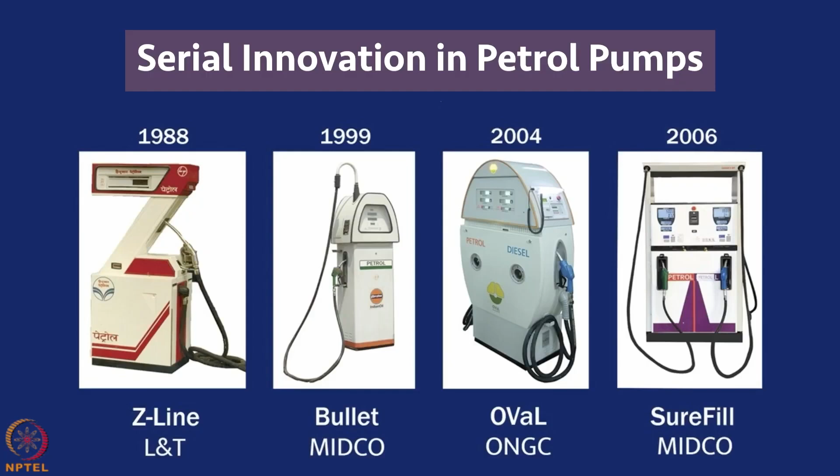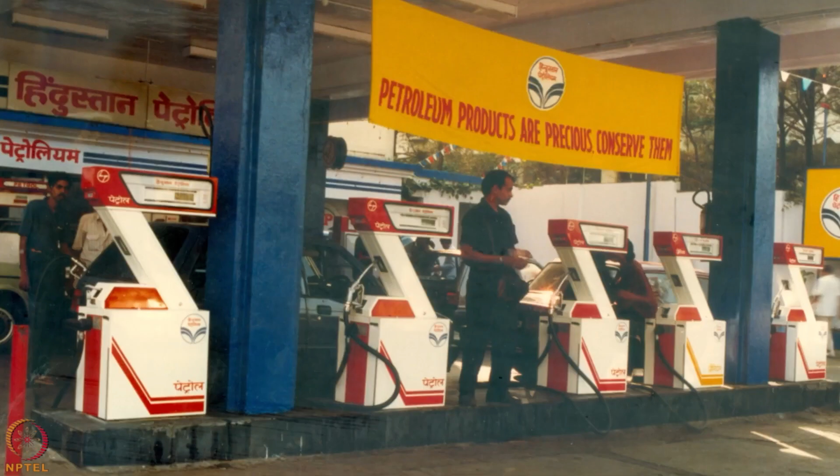When does serial innovation happen? It happens when you're in the same product segment, doing innovation every 10 years or every 5 years depending upon how the product is going forward. Today we're going to discuss the bullet dispenser, the center part, the bigger product. Though the Z-line was so successful that it swamped the market, and all the petrol pumps showcased the Z-line petrol pump, what happened? How could you actually upset or offset that and come up with another product? This is a very important lesson for us, so please see how this happened.

In fact, when I was doing it, it was like research for me. I was doing research in this area to see how I can come up with a methodology for innovation. So same products across different timelines, and you're taking it to the next level of innovation. I'm showing you this serial innovation specifically because finally it is the users at multiple levels who are actually accepting your product, and how they are demanding and requesting for it.

A very interesting thing happened. Once the Z-line was very popular, already 6 to 7 years in, I got an offer to join as faculty in IIT Delhi to start a new program in design. So I accepted the offer and moved from Larsen & Toubro to academics. Then I started doing a lot of programs for industry, telling them how creativity is important for engineering, how innovation methodologies are critical, and how design thinking is very important for making wonderful models to understand design details.

While doing all that, the competitor's head of R&D was in one of my exposure workshops for industrial design. When I was looking at all the research and documentation, I found that a product has a life, and it's ethical to start working on a new design in the same domain only after the lifespan of that product is over. The lifespan given to the Z-line pump was 6 years, and it was already 8 years when Midco came to me. So we said, please come, we will work on this project.

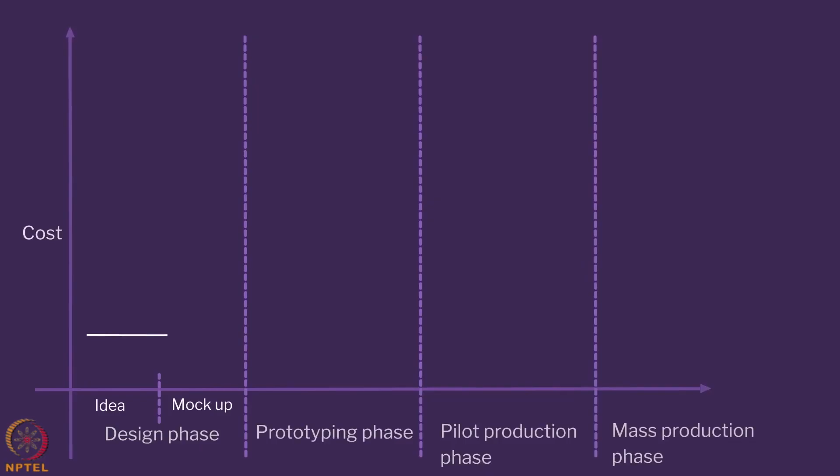So he sent the CEO of the company here. Top management support is very important because the innovation process is a very expensive process. The expenses build up as you go through the process. The idea and design phase is not very expensive, whereas the prototyping phase and the mass production phase are very expensive. And just imagine, when a company is not doing well, will they have enough money?

The CEO of the company was in the family business. So he took special loans and said, I have to spring back, and I have to work with the best in the country, including collaborations for various engineering components—we need to spring back. So this Mr. Arup Chatterjee, the CEO of the company, came back to IIT and said, you have to work with us. Now that you're a faculty, you should work with us and produce a pump. They didn't say at that time that you should replace the Z-line or whatever—they said you have to design a pump so that we also can be in the market.

All on the same framework I learned at L&T. Remember, I was very clear: contemporary materials, understanding users in the best possible way, bringing up creative ideation. At every stage—manufacturing, technology—creative ideation is a must. So these three pillars were used every time, and we used the same three pillars again for this process. We took it as a student project and started the journey.

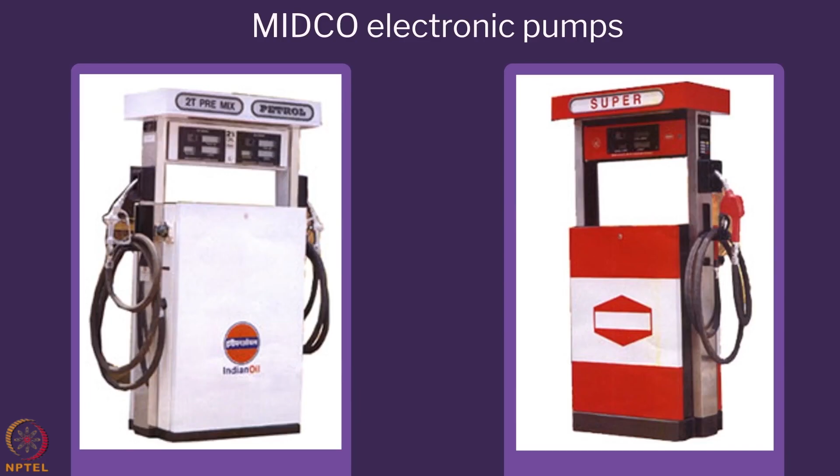Now look at what Midco was selling—this was what they sold before the Z-line came up. This was 3 years ahead of the Z-line, and after the Z-line came out, nobody was buying this pump. Our electronics was superlative, our shape was phenomenally new, our manufacturing was excellent, our quality control was very, very good, and cost was low because we designed for low-cost production. Every part of the sunflower model, those petals I showed you, were excellent—so this pump could not compete.

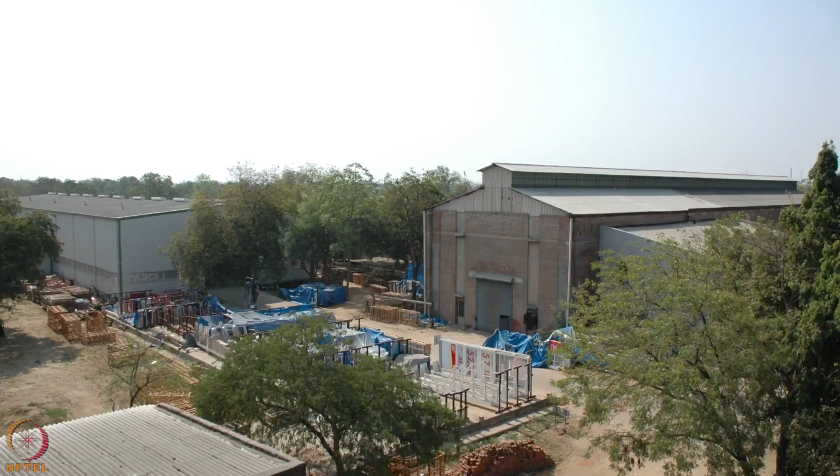Compared to Z-line, you can see that Midco was a very small company, 1/100th or 1/1000th the size of Larsen & Toubro. Their advantage was that it was a single-product company—they had no other business other than petrol pumps. And they came into petrol pumps after manufacturing gas cylinders.

We need three important things when a new company comes in. You need investment in manufacturing, investment in human resource, and the biggest challenge is that human resource for design was very difficult to get.

Customers were far more demanding over the years. It's already 8 years since we did the Z line, and a lot of things changed in that time. Remember I gave you the example of laptops - every year we get laptops which are better, cheaper, much more capable. Same phenomenon here. After 10 years, a lot changed, so we need to look at everything in a new way.

As soon as we started the work, the company was very aggressive. You all know innovation happens in war-like situations - Midco was completely out of market, starving. So within IIT, luckily one of my students agreed to do this project - Manoj Dubey, my student at IIT Delhi, third or fourth batch of the design program. Manoj took up this case. We used the same formula of ideation, taking inspiration, making multiple small models, and doing CAD modeling.

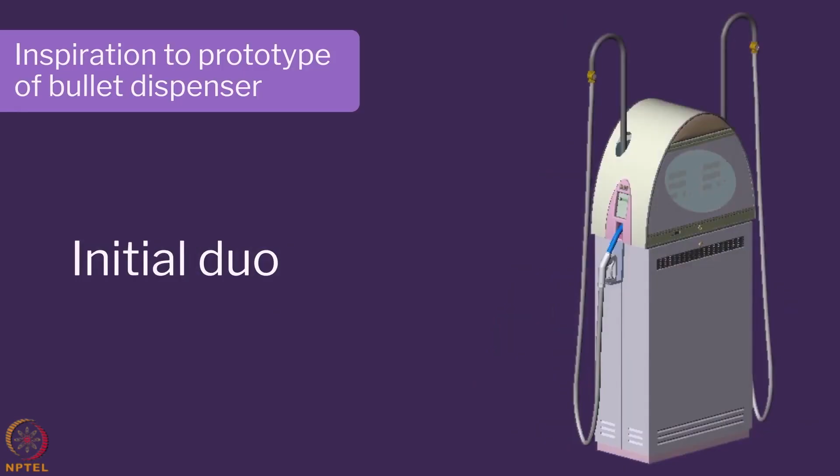Today I'm going to discuss the management and collaboration issue more, because all others are constant, whereas in the Z line I didn't talk about that much since L&T had all the structures inside very well. What happens when the designer joins the company? You get tremendous synergy to take the project forward.

So Manoj Dubey had joined the company with Midco. Then Midco started a new department in design. When you're doing innovation, sometimes your old human resource is not good enough - you have to bring completely new people. So Midco hired completely new staff for doing design, CAD modeling, because the old staff didn't know how to use CAD to take products forward. This was a completely new setup where the design was supposed to be taken care of.

Now look at the interesting situation. You have the display, which is large. You have the hose coming from the top. You have a vertical organization - earlier there were boxes, right? Now you got a vertical sleek look. So the organization and form is very, very critical, and you had to come up with a new design.

Why do you think you're able to dispense fuel faster from this? More pressure with the hose from the top? That's a good point, what else? But if I have more head, will I get more pressure? There's a motor pumping it all the way to the top - the motor is anyway pumping, so I took it up. But then why should the delivery rate increase?

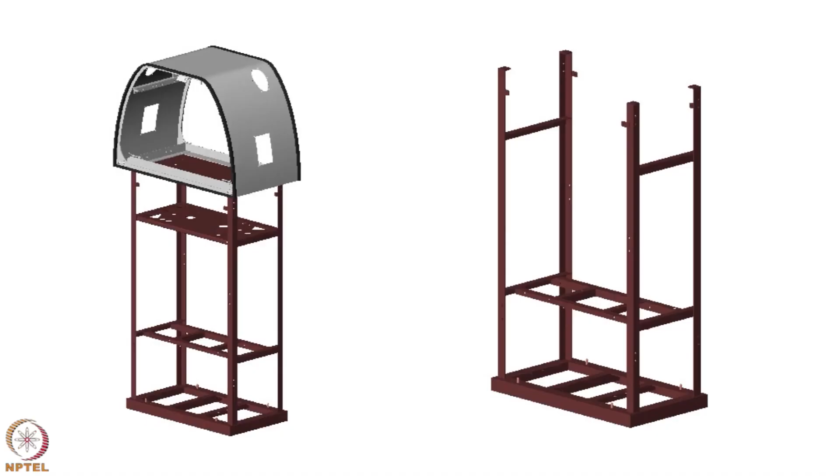You all understand what is a chassis, right? Frame. So this whole pump was built on a chassis. Then it had this convenience for mass production - I'll come down to that a little later. It had a large display fascia.

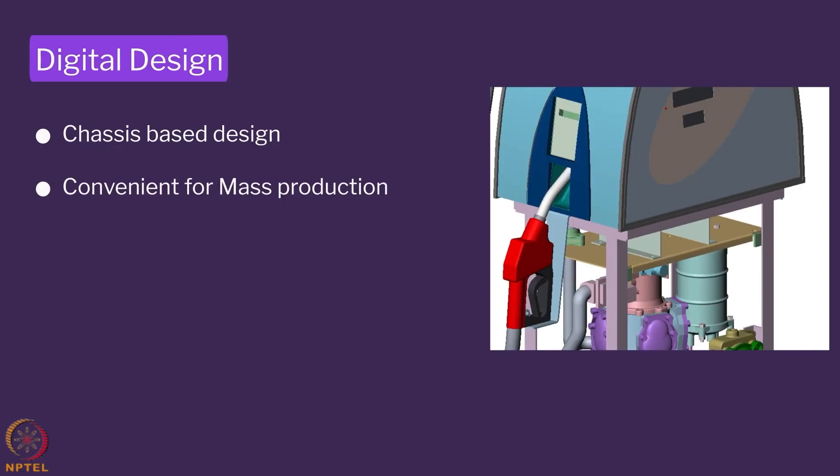That large glass and large fascia was very critical because at that time we had large TVs coming into the market, so people were very tuned to seeing large displays. It also satisfies international norms for safety. Midco very early told me that we want to export this pump all over the world, so the standards have to be met, and when standards have to be met, explosive standards are very stringent. You need to have something called an air gap between the electronics and the hydraulics - can you see that air gap in the middle?

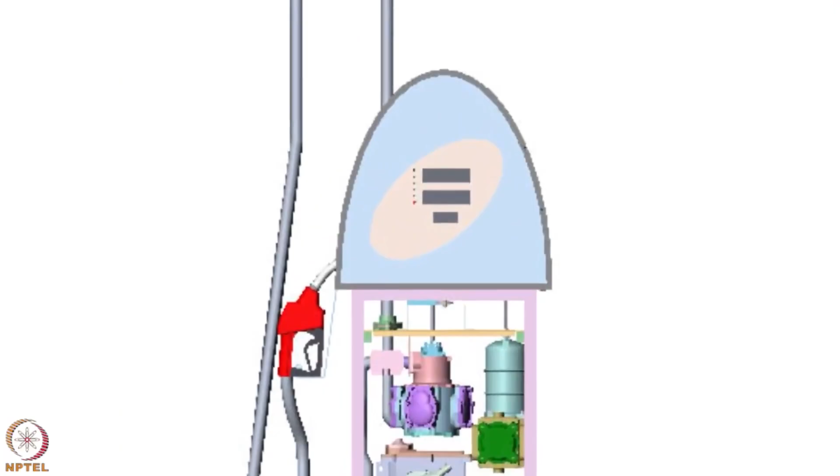Why do you need an air gap between hydraulics and electronics? Any sparking in the electronics can produce fire and explosion, because that environment in the bottom is rich with hydrocarbon, rich with evaporated petrol or whatever. So you need to have a barrier between the two, and that was an important norm.

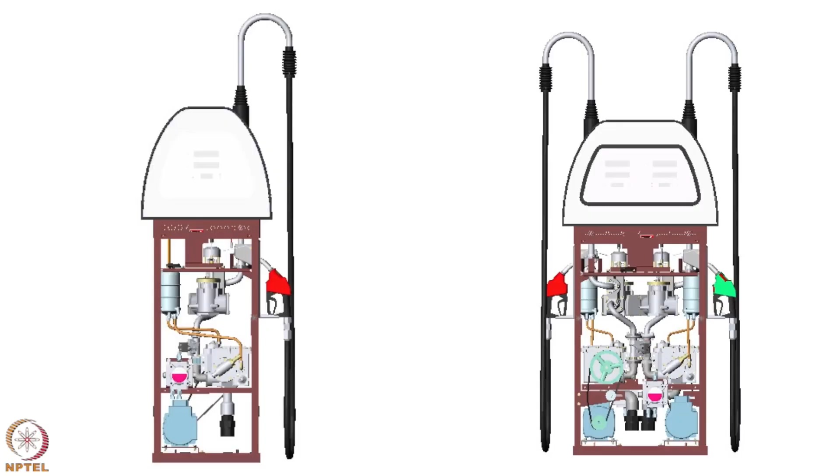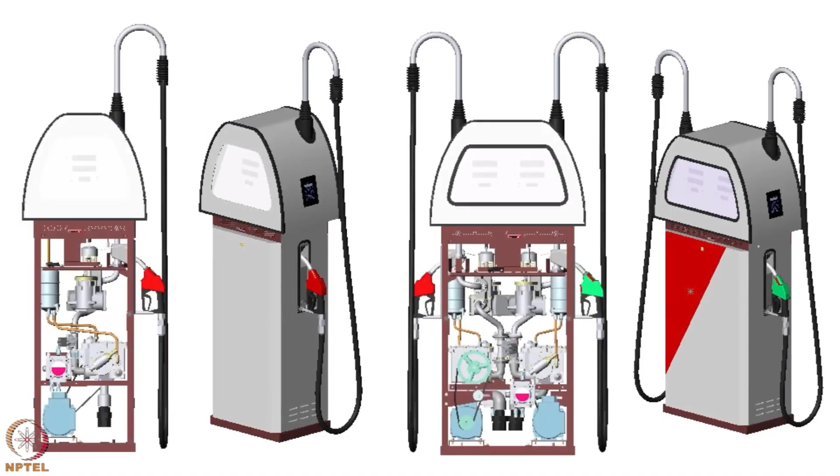We used computer aided design a lot, and we had very high accuracies and very high modular design. So how computers helped us was, once you make this structure, we could fit a single pump and double pump also. What's the advantage of this? Again, less number of parts.

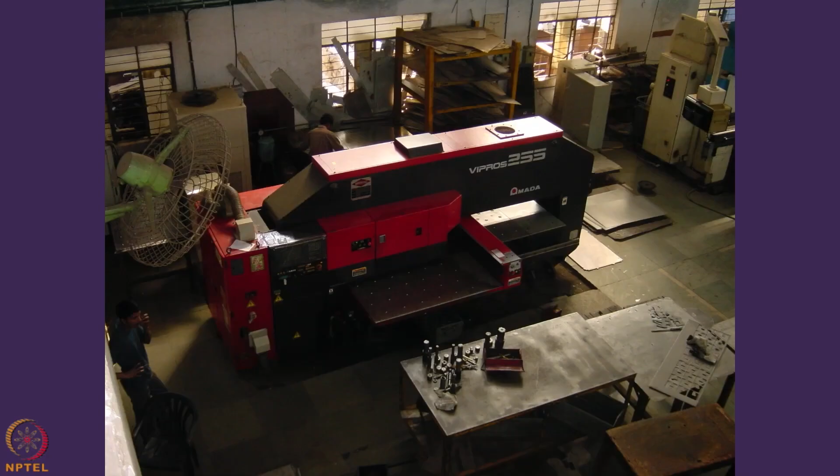And Midco is not a company like L&T which had all its manufacturing in-house. So what they were doing, they were getting components from the vendors. So when you were getting components from vendors, it makes sense to have modular construction where you can have the same components again and again.

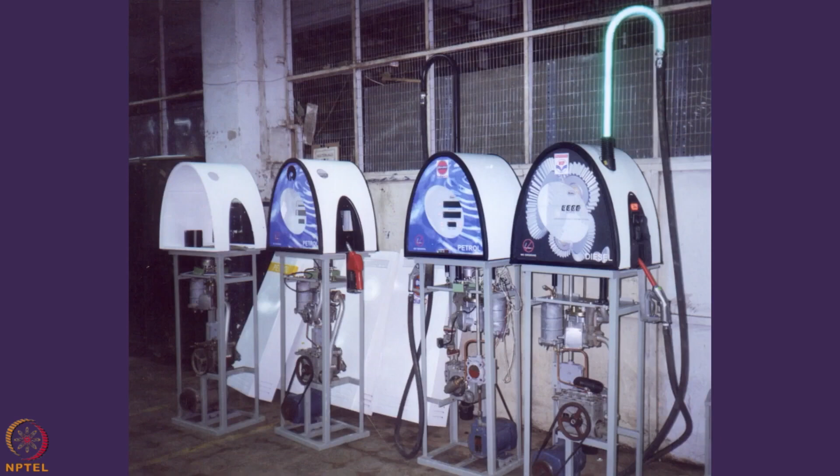Look at this whole array of first prototypes. In fact, as soon as Manoj joined the company, while he was in IIT, he produced this one first pump. After coming into Midco, he produced all these pumps which are all different.

It's a mechanical pump. So can you imagine the advantage we have of putting a mechanical register into the same body? Why do people use mechanical pumps in rural areas? Electricity - severe problem of electricity, and they crank and they dispense. At that time, power was a serious problem.

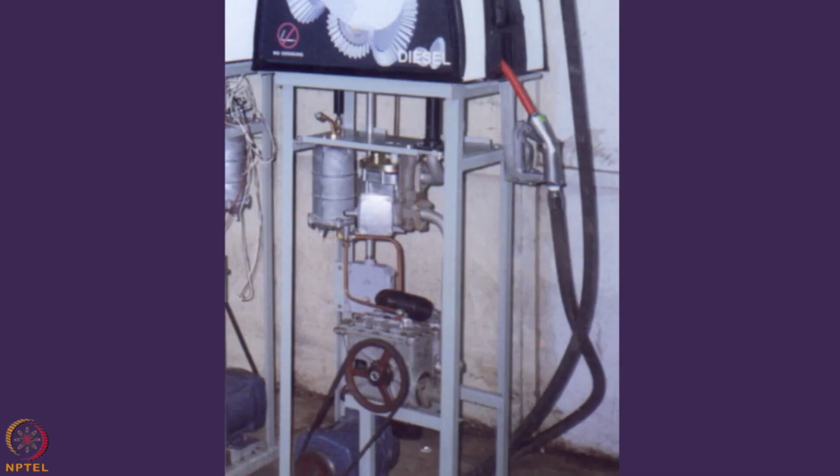So just look at the beauty of this design. Manoj could actually fit a mechanical register in this, and have all the advantages of the new design and the advantages of modular construction. Very, very cost effective. And then you had the dual pump, both sides pump, and the single side pump. So we had all the options over here.

So let me quickly show you now the results of the research. So this was research, right? So while Manoj was in the company, I was finishing my research, and I think, how does this success happen?

So this is the model we developed, which I showed you earlier also - the core team, the enterprise-wide team, and the network team. Very important. Any project you do, even if you're doing a BTP for your project, if you follow the teaming, you will get phenomenal success, and this happened regularly every time.

And then what happened with this success, you need to also divide your stages into multiple stages. First you have ideation, multiple concept generation, prototyping, mock-ups. So all those stages are also important. So while you have this collaboration across teams, you also have steps in going through.

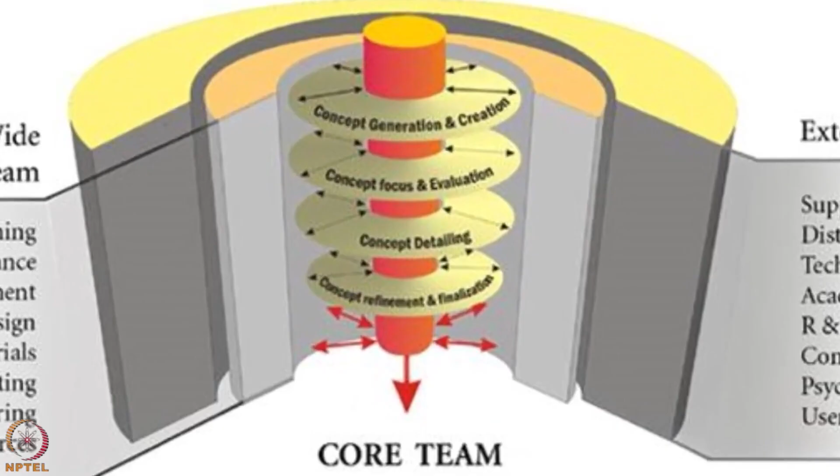And now look at these team members. The core team is made up of Manoj Dubey and 4 other engineers, CAD engineers, prototype engineers in the company - a very small team. But what was the bigger team was the enterprise-wide type cross-functional team. This was very, very big.

Look at the beauty of product planning in Midco pumps. What was there? From mechanical pump to single pump to double pump, and I'll show you one more, to premix pump. I'll tell you what premix is a little later. So we had excellent product planning.

The companies survive on investment, right? How much investment you do on your prototyping and on your different components on your manufacturing. So investments are low and you have large range of products.

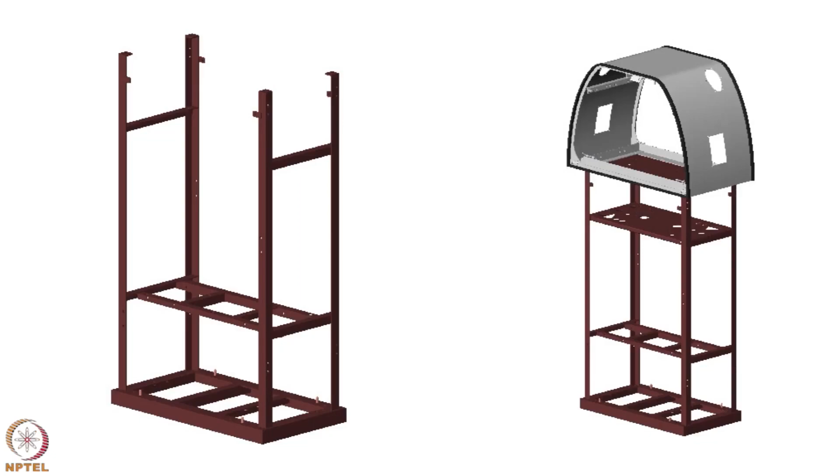That is very critical. Now there's a chassis, right? So use less sheet metal, and the chassis was cheaper than using sheet metal to mount, because chassis is very strong. And look at these pipelines - the same pipe I'm using 2 times. And this pipe is done using special aluminum alloys in special CNC machines.

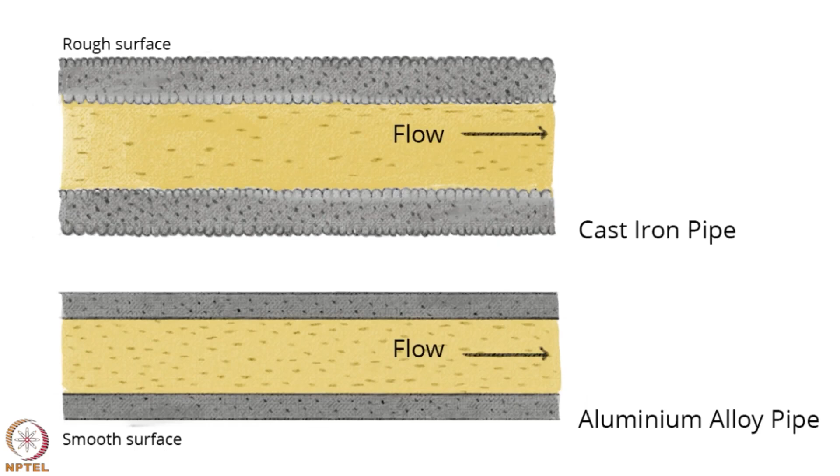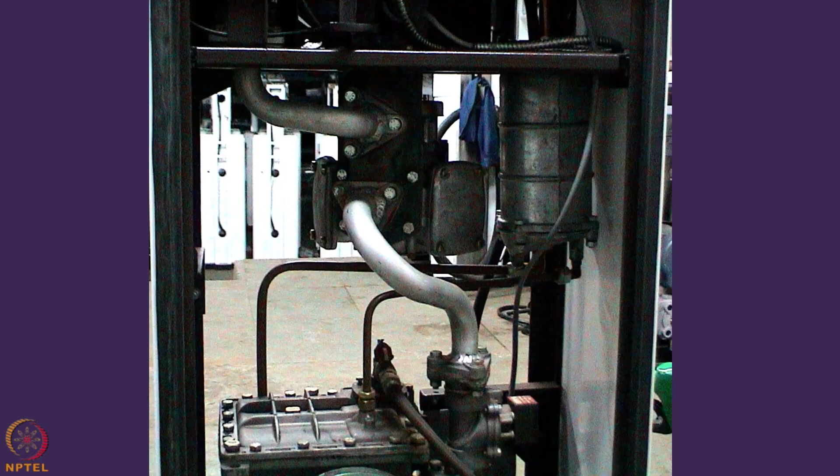And now coming to my hose on the top, L&T was using cast iron conduits. What happens inside cast iron? The inside surface is rough. Aluminum pipe, inside is smooth. When the surfaces are smooth, you have much better flow. So our hose, which is giving 55 liters per minute from the top, actually is being aided by the smooth aluminum pipes inside also.

Look at the air separator. This is the air separator. This is the meter. And these are the copper pipes for the air separator, and this is the motor. And how all this is possible? Because of CAD. We could develop the modular system so well, and CAD was used extensively.